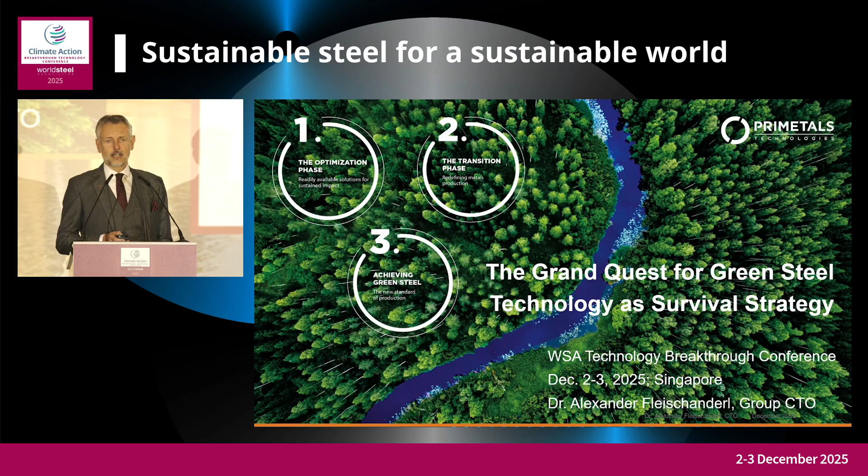Well, the grand quest for green steel - that's a kind of retrospective about the last 2 years. What has changed in the challenges, but also what is the progress we have made in this industry? I'd like to start with the challenges, the global dynamics.

We have definitely seen over the past two years a significant slowdown of economic growth. We have also recognized significant capacity increase in this industry, while demand remained pretty stable. According to the World Steel Association, we have had 640 million tons of excess capacity in this industry, and it's still going to grow - the forecast is 720 million tons a year.

That's a challenge, because that's bringing a lot of pressure on steel prices, and if steel producers are not profitable, they cannot invest into decarbonization. So that's one of the major roadblocks, I think, that has to be removed.

The other thing was the inflation, the high energy prices in certain regions of the world. And while we all have recognized that decarbonization can only work if we work along with electrification, that's a base condition - renewable energy at a reasonable price. It's another roadblock we have to solve altogether.

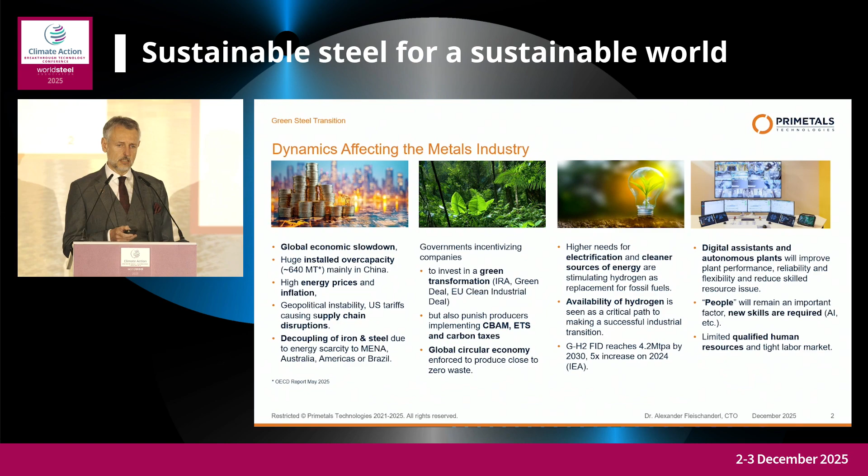And finally, we have to address that the steel industry is still not the most favorable place to work for young talents, so we have to attract young talents. And we have a lack of knowledge for the new technologies, so we have to educate people for the operation, and that brings digitalization into place.

Well, you know that slide, I always use it, and it was said also by Dr. Edwin Basson that we have a three-step approach.

First and most important, we have to concentrate on decarbonizing the existing assets, optimizing and taking every effort there. While the transitioning phase is about how to decarbonize integrated steel mills, implementing electric arc furnaces or even a direct reduction plant, while maintaining operation of the blast furnace. The last phase, we have to wait for the hydrogen economy and sufficient renewable energy to really enter the green steel phase.

That's still our outlook from Primetals Technologies, a little different from what we've heard from Dr. Edwin Basson. We believe blast furnace capacity is going to reduce to 35% from about 70% last year. But it doesn't matter if this is 35 or 50%—it's important to recognize the blast furnace will be around for a long time, and we have to concentrate on how to decarbonize that route as well.

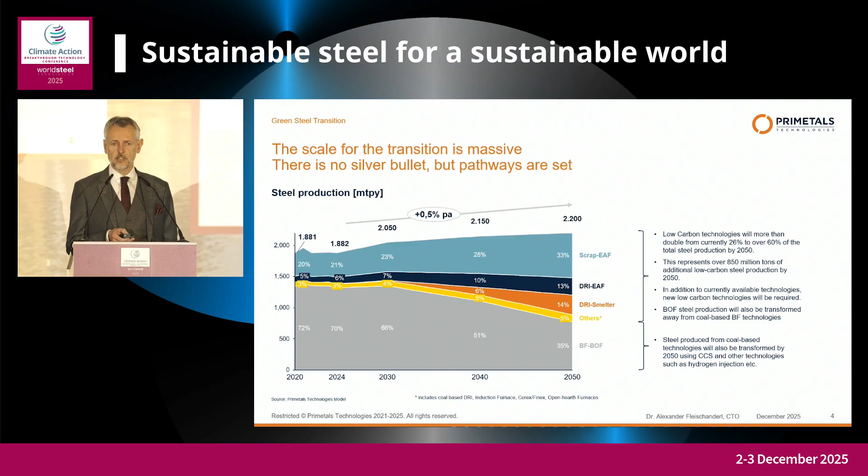We will see significant increase in scrap recycling via electric arc furnaces, which is one-third in 2050, and the last third we believe is based on different types of direct reduction technologies. So this is a huge effort—850 million tons of the actual production route will have to transition. That's a huge investment, a huge effort, and a huge energy demand to proceed.

Over the past two years it's become obvious we talk about four main steelmaking routes in the future. The first is the integrated route, where we concentrate on decarbonization. Then the focus on advanced electric arc furnace technology, mainly based on scrap but with some dilution from virgin metals. The other two routes are based on direct reduction technology, depending on iron ore quality—low or medium grade requires going into a smelter to sequestrate the high volume of slag and provide slag that finds its way to the cement industry. For high grade iron ore, we can go straight with DRI or HBI into the electric arc furnace for steelmaking.

The good thing is direct reduction technology is flexible. It can work with hydrogen, but it can also work with natural gas or any mixture thereof.

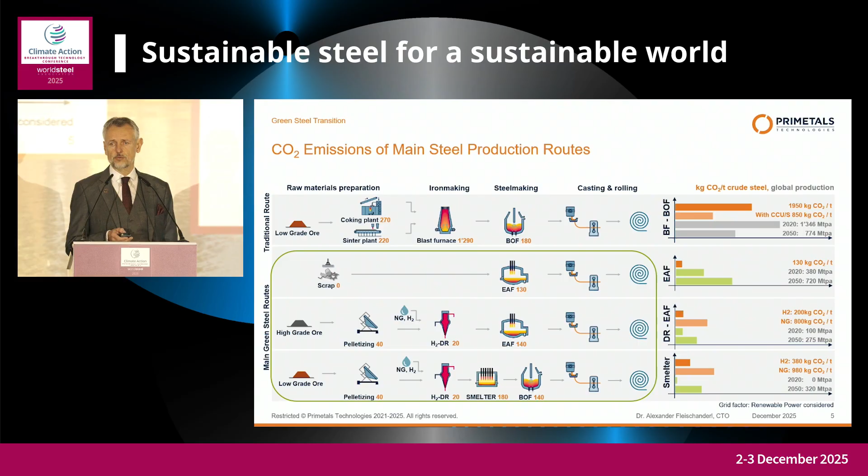Another important progress over the recent two years has been on the twin transition—adding another transformation on top of the decarbonization transition with the digital transformation. So it's all about data intelligence, digital assistance, artificial intelligence, and stepwise moving towards autonomous plant operation.

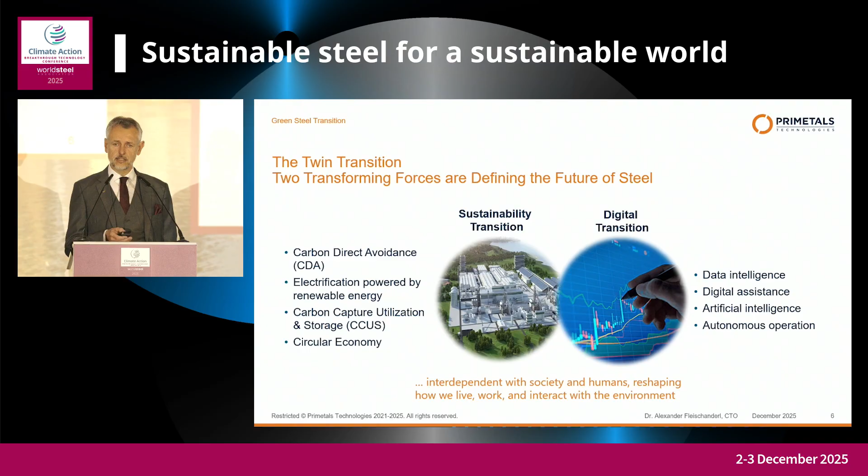So we can say both transition pathways are strongly interdependent with each other, with society, with humans. And everything is going to change—how we work, how we produce, and how we interact in this industry.

That's about the likely decoupling of iron and steel making, mainly due to the availability of renewable energy and the pricing of energy, but it's also about raw materials. Raw materials is another extremely important pillar.

We see in the future an undersupply of DR-grade iron ores, the highest iron ore grades, while likely we'll see excess capacity of low to medium grade iron ores. Therefore we believe the smelter, when it's de-risked and proven in the industry, will have its right to replace blast furnaces mid to long-term as well.

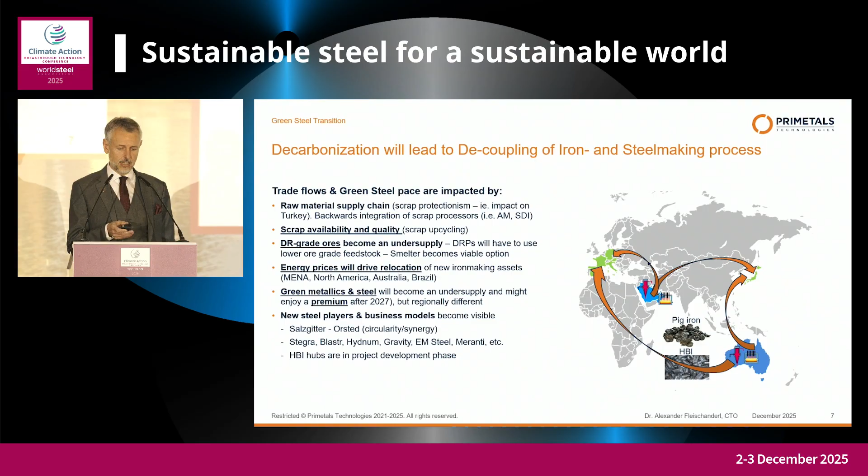Scrap, the second important raw material—we will see increased scrap at the end of lifetime, and every ton and kilogram of scrap is going to be used. That's a good thing; we will require less virgin iron ore in the future. We have to ask ourselves, and that's why we appreciate having the upstream integrated in this conference, because it's a discussion: how many new mines do we require to go for DR-grade iron ores, or do we utilize the low and medium-grade iron ore available when we blow down blast furnaces, and use this excess capacity via direct reduction and smelter technology?

Coming to these three different phases, in the interest of time I can't spend too much on individual technologies, but it's important not only to concentrate on the blast furnace for decarbonization measures, but along the whole value chain, starting from iron ore beneficiation down to the finalized steel product. There are endless opportunities for getting more energy efficient, from waste heat recovery measures.

There's still a lot of potential integrated into the heat balance there, but also improving the yield, the quality of steel, improving the lifetime of the steel, and many other efforts that we still have in front of us.

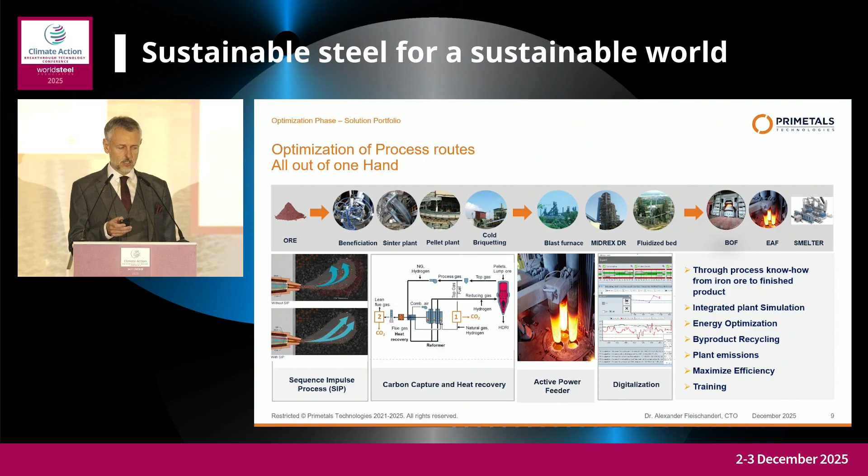I'm just going to pick one because it's relatively new, and this is retrospective about the last 2 years - that's the SIP technology, Sequence Impulse Process. It's one technology that can be added to the blast furnace operation to decarbonize, to inject the oxygen via the tuyeres at high pressure, high frequency pulsing.

This keeps the raceway clean, improving the CO gas utilization in the blast furnace, also with the potential to improve the productivity of the furnace and allowing to go for lower grade feedstocks in the burden. It's about 2% decarbonization of the blast furnace, but we know that the blast furnace is the biggest headache we have.

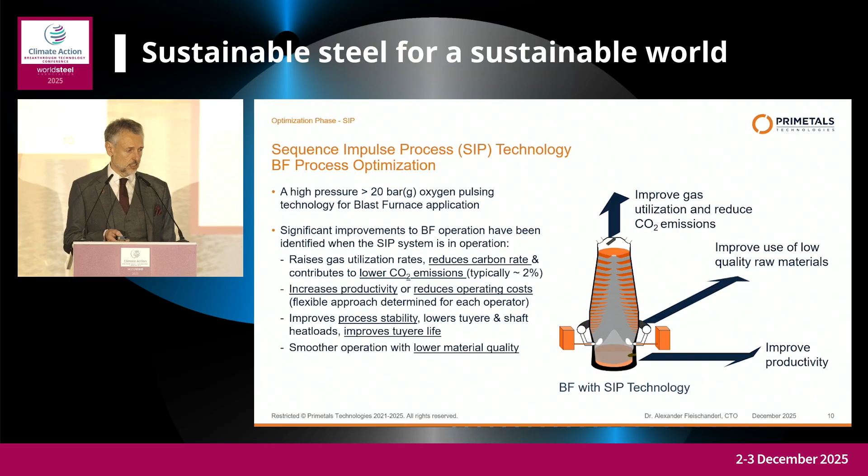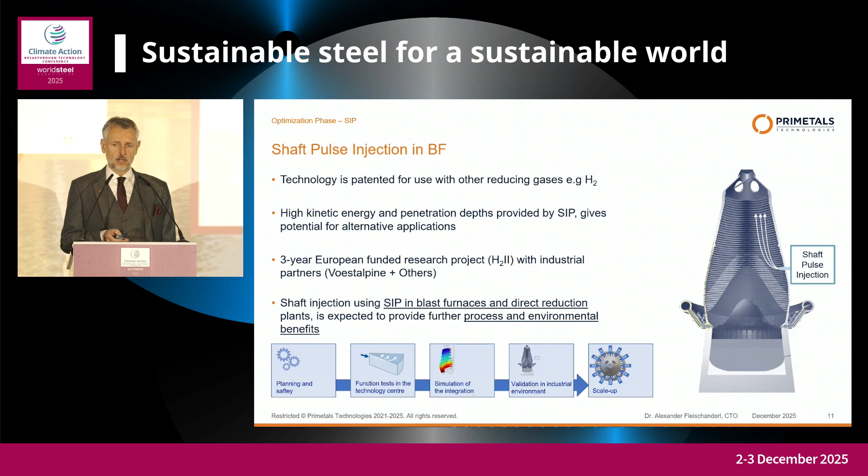We also intend to apply the same technology for shaft gas injection, and we've started, together with voestalpine and K1-MET, a project to investigate applying the SIP technology, especially for hydrogen injection in the blast furnace shaft. This is a 3 year project ongoing.

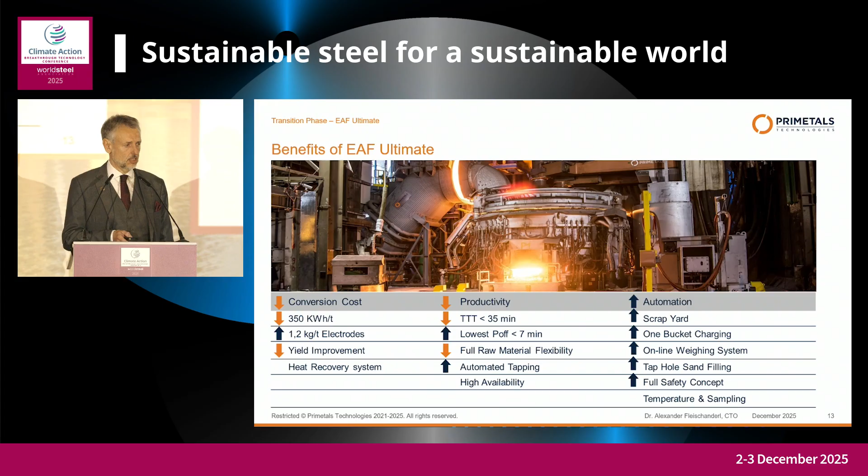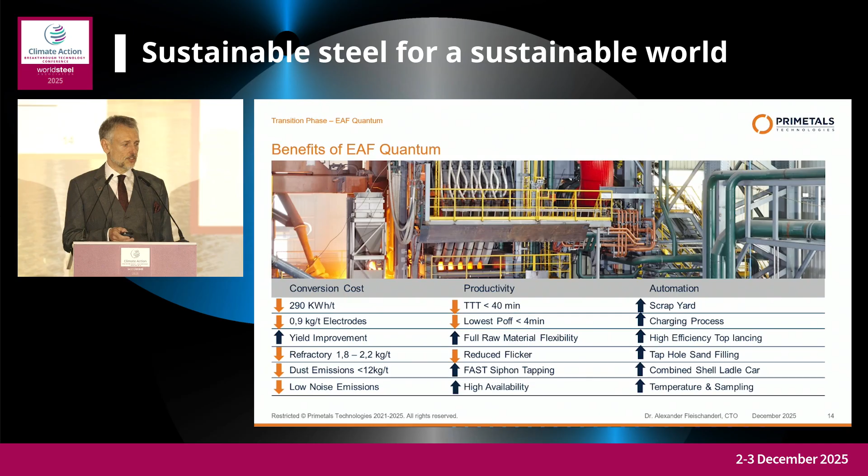The other technology is the Quantum technology. It works with preheating of the scrap, and it's the technology that utilizes the lowest value of electric energy for scrap melting. It's a furnace dedicated for high scrap rates on a finger system, and you see there less than 300 kilowatt hours per ton are possible.

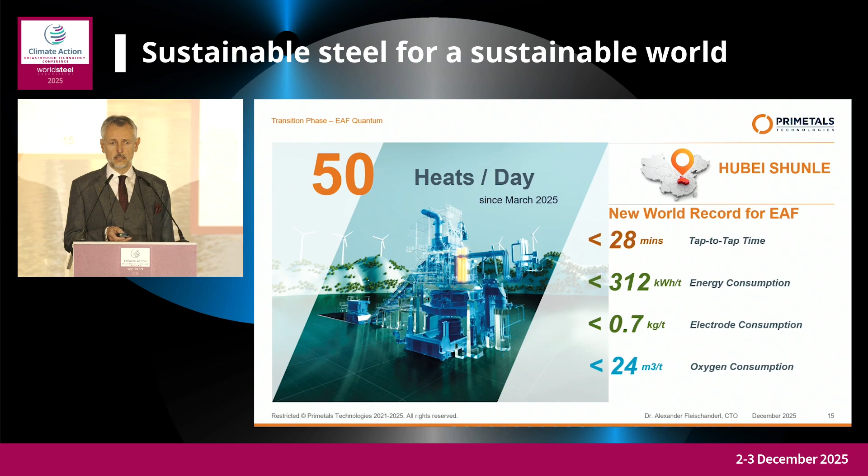Just a record that we achieved this summer in China: one of the Quantum furnaces, 50 heats per day, which means less than 28 minutes tap-to-tap time at 312 kilowatt hours per ton.

When we talk about electric arc furnace, another requirement is that we fulfill the grid code. So the more renewable power we find in our grid, the grid providers are asking to avoid any flicker, any backdraw to the grid. Over the recent 2 years we have intensively worked on developing a medium voltage-based multi-level converter technology that completely avoids flicker, also current peaks, and improves the utilization rate of the electricity to the electric arc furnace.

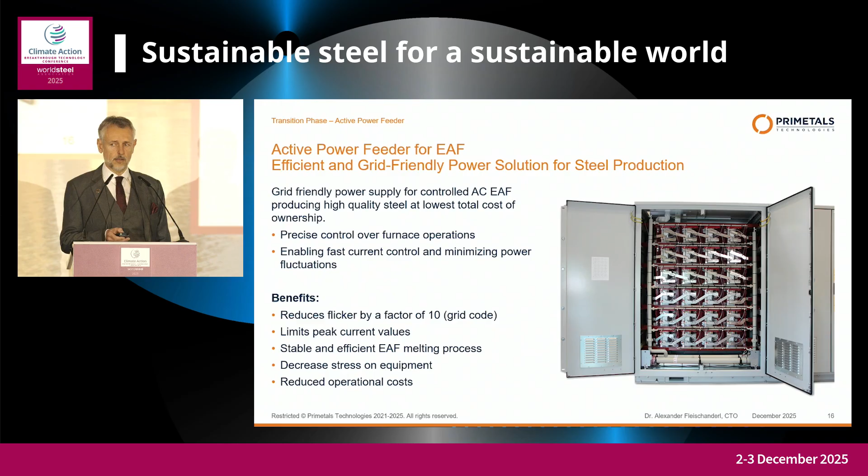I'm proud that we have started up the first of the active power feeders in the last months at an electric arc furnace in Germany, still ramping up, and from early next calendar year we are going to scale up for large electric arc furnaces with the same technology.

Talking about the challenges if we go for hybrid mills, implementing electric arc furnaces while we maintain the blast furnace and BOF route - it's a challenge because integrated steel mills are not used so far to operating an electric arc furnace, and now it's about reliably producing the same steel quality for the demand side as with the BF-BOF, and deciding which steel grades to produce on which production route.

So we have to support the operators to achieve that target, and that's the main goal of the central operation cockpit that we have recently introduced at the hot strip mill in Germany as well. The target is really that we can achieve a single man-operated pulpit for a complete facility to be operated.

That's only working if you have a couple of monitors only, not hundreds, and you have event-based tracking. Only where action is required is brought up on the screen with a recommendation of which action to be taken, and if there are multiple events, they are prioritized - what's the most important action to be taken. So that's a real guiding system for the operator, and I'm pretty sure that's the future for this industry.

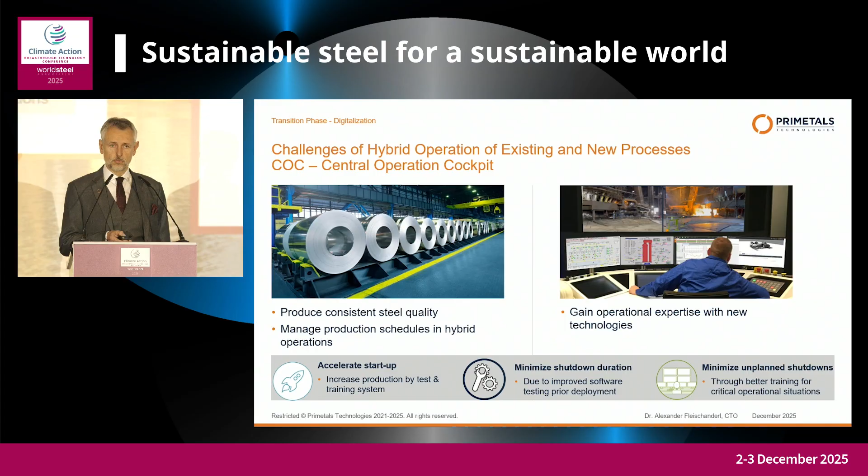And that's all about having, on the one hand side, a real plant, but on the other hand side, a full digital twin. And the full digital twin, I mean really a metallurgical and a process digital twin that can really simulate the production offline there, to develop new steel grades, to train the personnel, as said.

That's the way forward, and we see definitely, almost on a daily basis, from all the OEMs and steel producers, new digital assistants, one by one, and each of them is promoting autonomous plant operation in the mid-term.

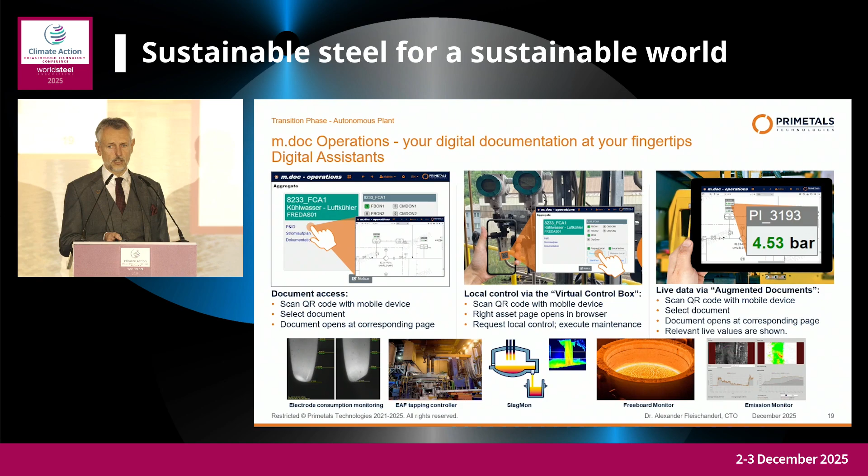So, what is important as well, what we have achieved over the past 2 years is the m.doc Operations. It's now that we supply plant components individually with QR codes. You scan the QR code, you directly link to the documentation, to the P&ID, and you have augmented real-time values in the P&ID when you go out there. So no local control boxes anymore, no cabling. You work with a tablet on that one.

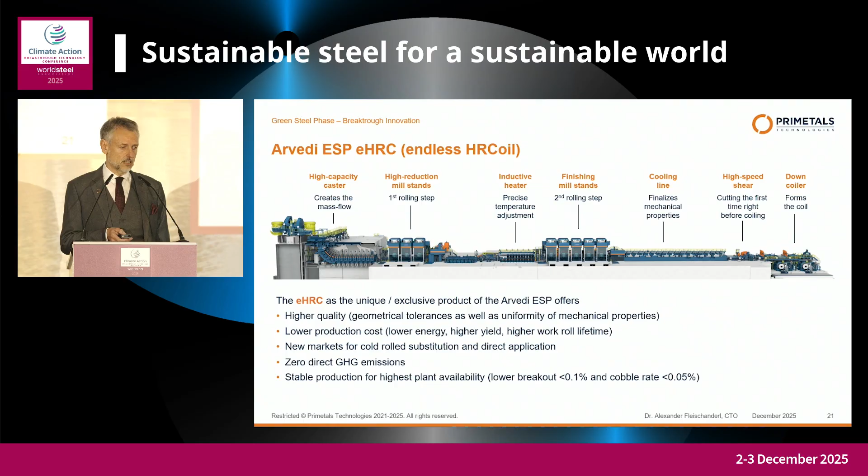And the last phase is the green steel phase. And one big potential is definitely endless casting and rolling, like the Arvedi ESP technology. I have to say it took a while, but now the industry is really obviously ready for endless casting and rolling. We've recently signed the 14th ESP contract in China, and what is so exciting is that we have partnered also with them for that one, producing for the first time silicon steel grades in a quite significant production portfolio in the ESP.

The last important thing I have to touch upon is about direct reduction. So the forecast is 470 million tons of DRI in 2070. So this means about 500 million tons of DRI capacity to be added. And there is, on the one hand side, the well-known Midrex technology where we are licensee of, but I'm going to talk about development, and that brings me to fluidized bed technologies.

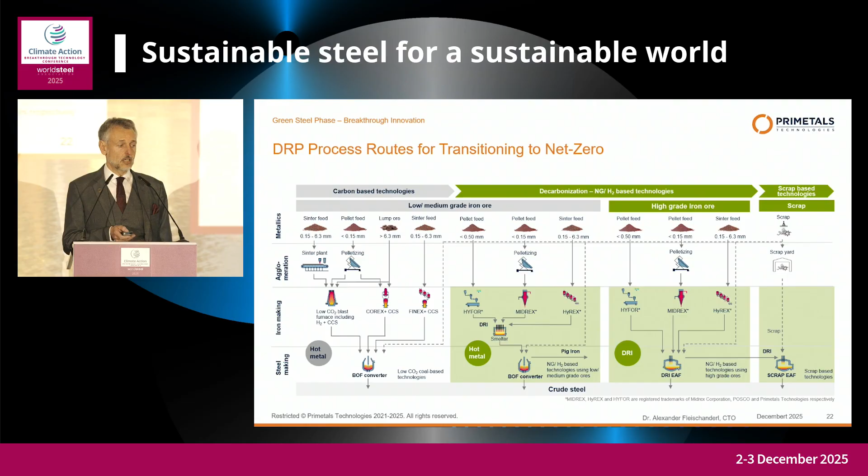And well, Dr. Kim from POSCO mentioned the pathway forward. So we are proud also to support POSCO on the HyREX development, utilizing sinter feed for net zero DRI and iron making. The other technology is the HYFOR technology, and I'm going to talk about it because, well, innovation is a marathon.

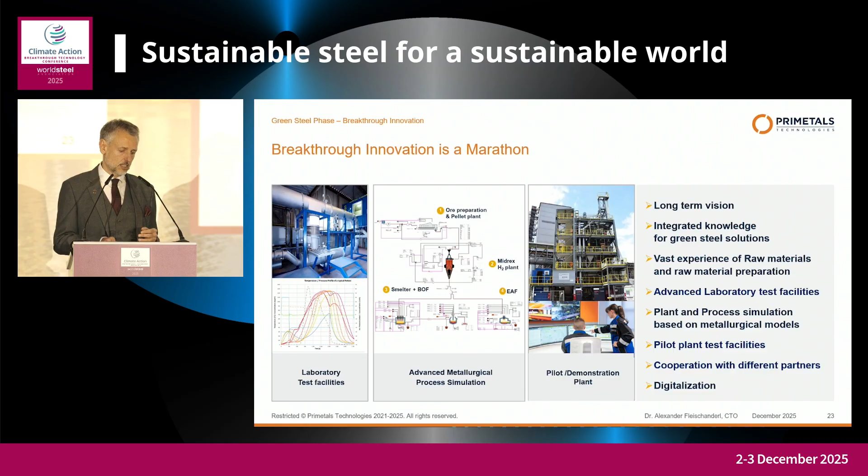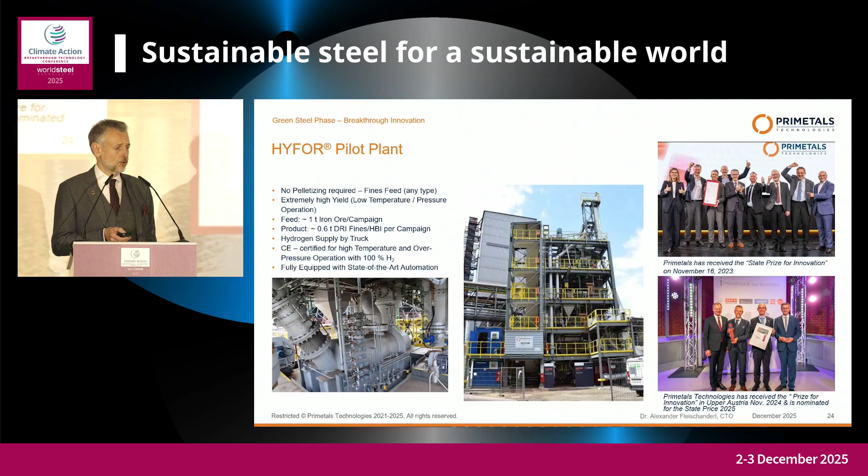And we are also proud that we have taken the FID decision in April this year, jointly with our partners, Primetals, voestalpine and Rio Tinto, and on the scientific side with K1-MET, to take now the next step for an industrial demonstration plant fully based on hydrogen, green hydrogen, renewable energy.

And what is the feature of HYFOR? It can use any type of iron ore independently of the quality. It is dedicated to operate with hydrogen, but definitely can operate also based on natural gas if it's transformed by reforming. It's a fluidized bed technology, as said. The advantage is it has the highest yield and low reduction temperature. It's a much lower reduction temperature than any other technology for direct reduction that is around.

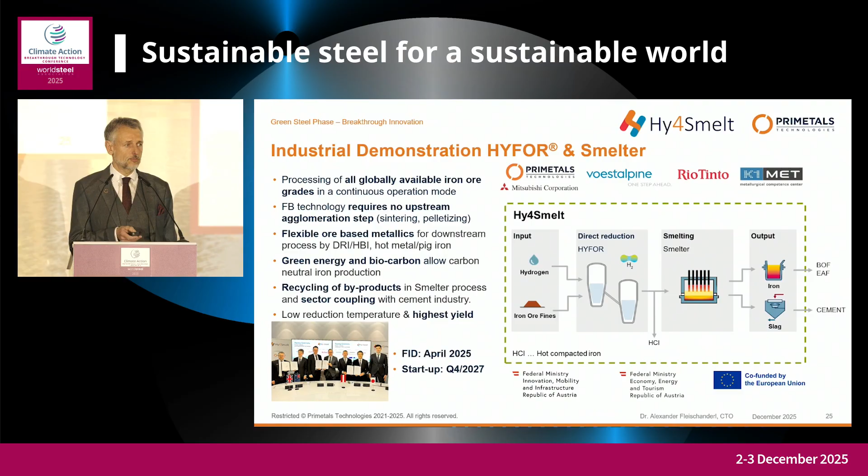So the smelter, I mentioned, we have scaled the smelter. We are implementing, together with POSCO, a demo in South Korea. We're implementing a demonstration plant in Linz at voestalpine, and we have already taken the next step to scale it up to the big size to replace the blast furnace.

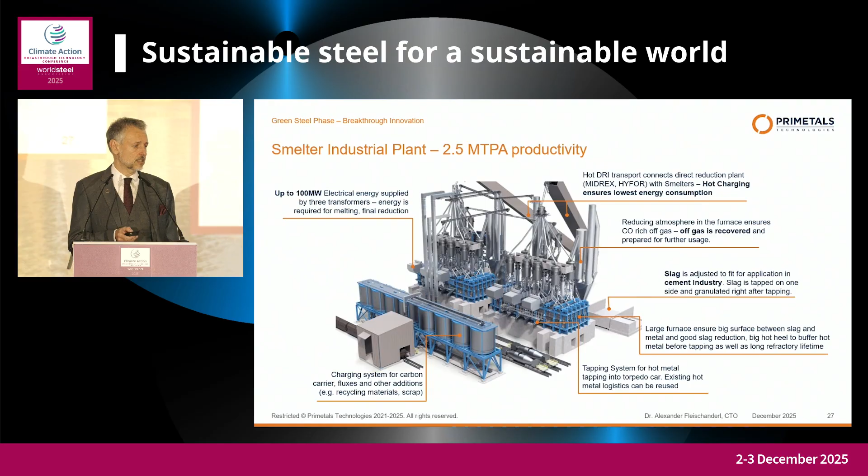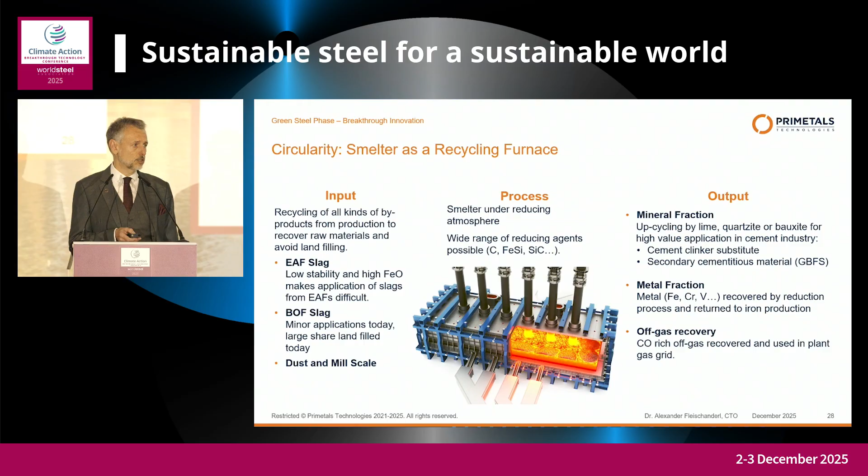One word about circularity. The smelter is also dedicated to utilize and treat electric arc furnace slag or any other type of byproducts. That's important. That's what we're going to do also in the showcase in the demonstration plant in Linz. It allows to treat electric arc furnace slag and other byproducts and to convert them into products mainly for the cement industry and recover the metal.

I'm jumping over that and coming to the end, as I consumed more time than I had already here, and just summarizing what has been said. It's a long journey to decarbonize. There is not one fit all. It's really a variety of technologies that we have to follow and to continue to succeed in the decarbonization efforts.

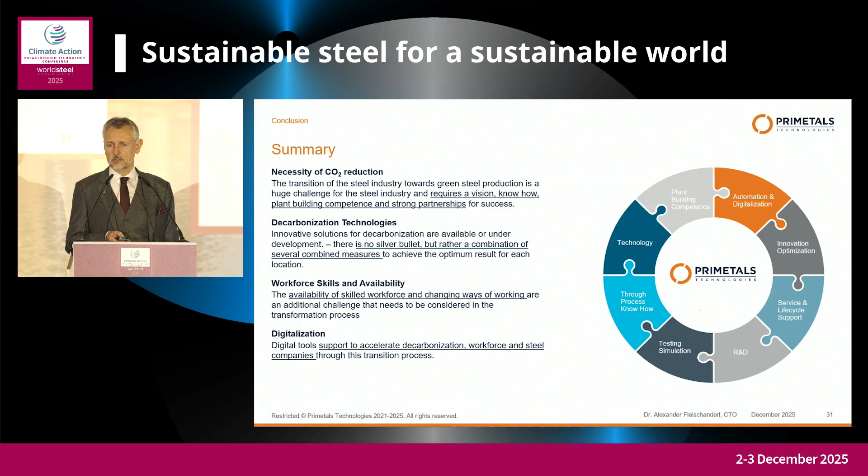It requires strong partnerships. It cannot be done by one alone, from the upstream, also including the energy sector, the OEMs, the steel producers, the politics, the financing sector. And we have also to focus on retaining skills, train people, and attract young talents in this industry. On the last point, digitalization, I have definitely no doubt this will proceed quickly, including all the artificial intelligence.

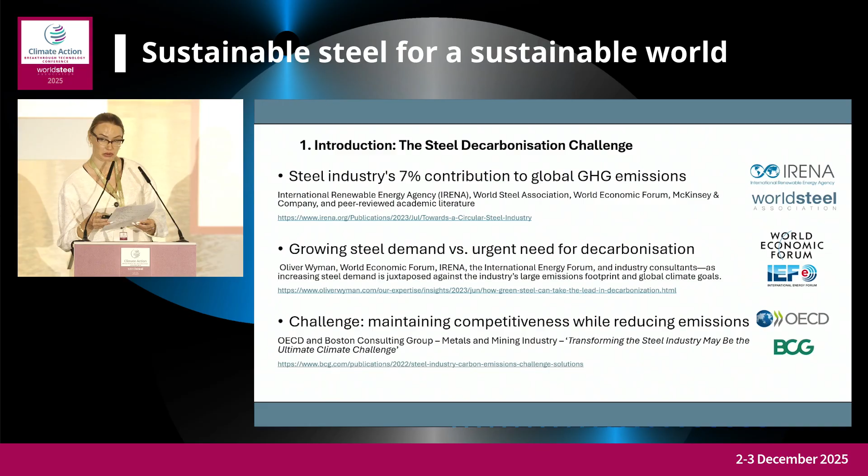We in Abu Dhabi witnessed the first metal park in the region, with a capacity of 450,000 square meters and a storage capacity of around 350,000 metric tons, with the purpose to bring the ecosystem together. The cluster is located in Musaffah in Abu Dhabi and was opened in 2025. Some of you might have witnessed the announcement of the Metal Hub during the previous conference, where it was actually conceptualized. We consider this the first step to enable industrial clustering in the Middle East.

Why is industrial clustering in the Middle East important? Because it's pooling infrastructure to reduce costs, optimizing logistics and resource sharing, de-risking investment through coordination, partnership, and collaboration, and attracting sustainable finance at scale. The Middle East has an advantageous position to accommodate industrial clustering. Two companies located in the hub are Emirates Steel as well as AGSI. And I would like to bring both cases and how they helped us succeed in emissions management and reduction of carbon footprint per unit of product.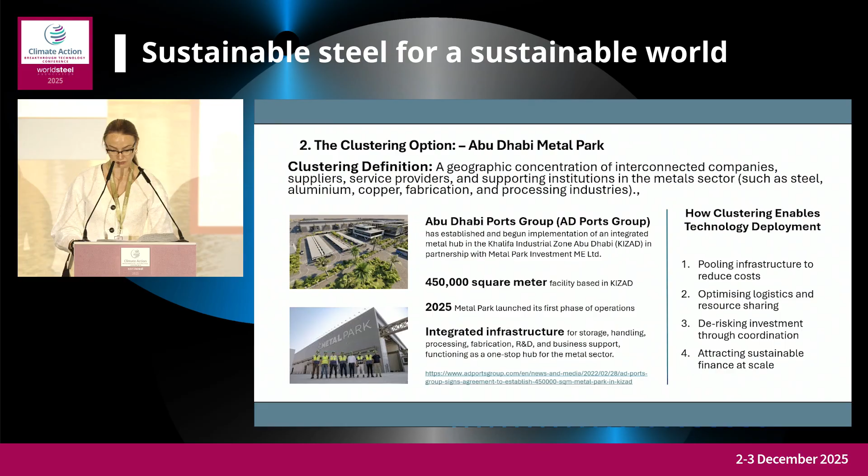So why the Middle East? As we discussed, the advantageous position of the Middle East is mostly associated with three main reasons. Firstly, we have the access to low-cost renewable energy. Secondly, we have the strategic governmental support for the industrial zones, like the one that I have just discussed. And we also have the public-private partnerships that enable the climate infrastructure.

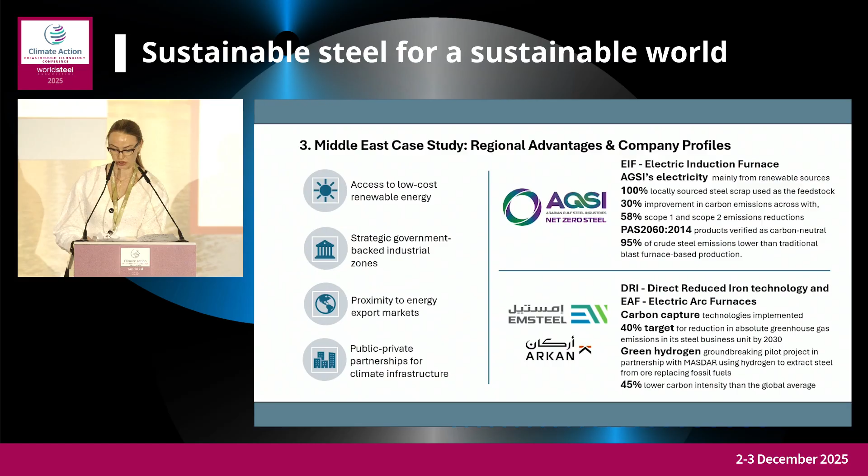So looking back at the technology breakthrough and which key technologies the ecosystem players in the Metal Hub have been using. The first and foremost is carbon capture and storage and hydrogen, deployed with the support of ecosystem players such as ADNOC and Masdar. Deploying them for steelmaking helped us to reduce emissions by up to 95% and position the UAE as the future hub for green steel production.

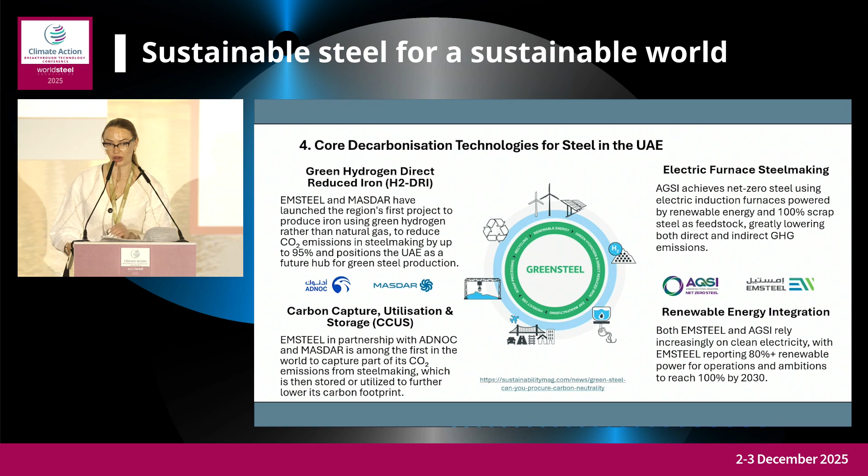Steelmaking with the application of electric arc furnaces or electric induction furnaces and deployment of renewable energy has the potential and capacity to use 80 to 100% of the energy supply sourced from renewable and clean energy sources. The deployment of those technologies has substantially increased the opportunities to progress in low-carbon steel in the region.

Concerning the investors' aspect and how we are looking at the risks and longevity of the metal hubs regionally, we see that there are three key mechanisms. The first mechanism is related to transparency in ESG and sustainability performance, as closely as possible aligned with, for example, the GRI, SASB or IFRS. Secondly, enabling policy tools, including the carbon tax and green procurement strategies in the hub.

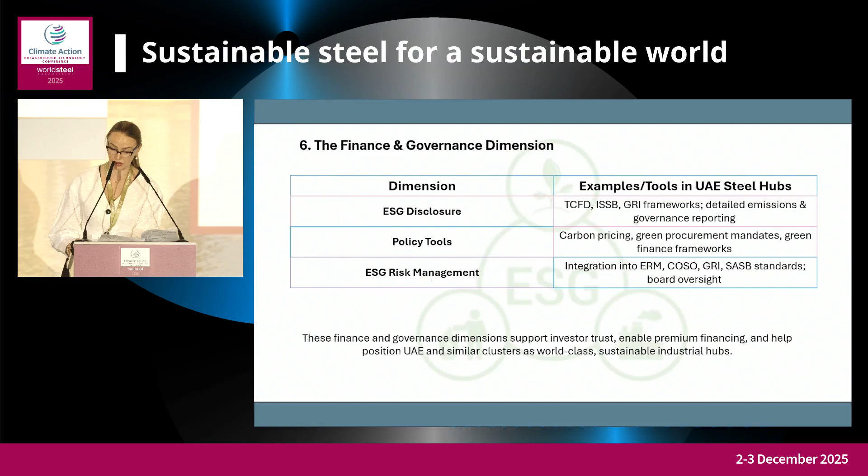And the last, a robust ESG risk management mechanism, including, for example, the enterprise risk management system and involvement of leadership in key decision making. Those finance and governance dimensions support investor trust, enable premium financing, and help position the UAE and similar clusters as world-class sustainable industrial hubs.

As the summary and the call for action that we would like to convey, we see that clustering has become viable with a regionalized approach. And I would like to specifically highlight aligned goals combining climate commitments, climate management commitments, and economic resilience, giving the example of our leadership in the country, where the decarbonization targets and ministerial commitments to increase the non-oil GDP should walk together.

And last but not least, the collaboration and engagement of partners, be it policymakers, technology providers, or off-takers, is extremely critical, and therefore I would like to encourage you to collaborate in our Metal Hub.

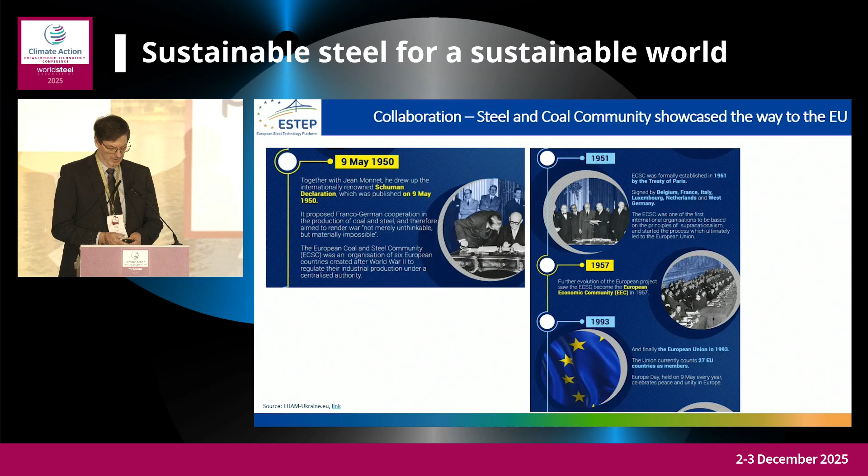More than 75 years ago, the CEOs of European steel producers sat together and decided to do something special to improve their competitiveness, to collaborate, to work together in a new way, which ultimately led, as you can see on the slide, to the foundation of the European Union. They established, together with their coal colleagues, the European Coal and Steel Community, dedicated to collaboration in research. It was a 50-year contract, evolving at the beginning of the 2000s into the Research Fund for Coal and Steel, and growing as member states joined the European Union.

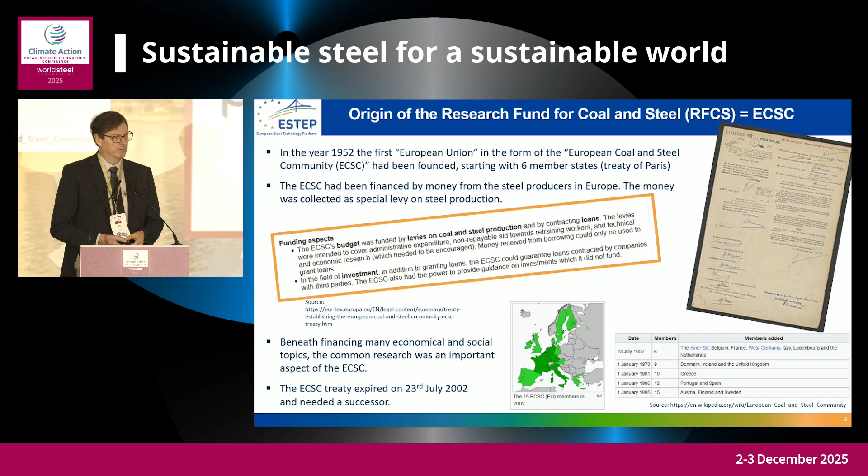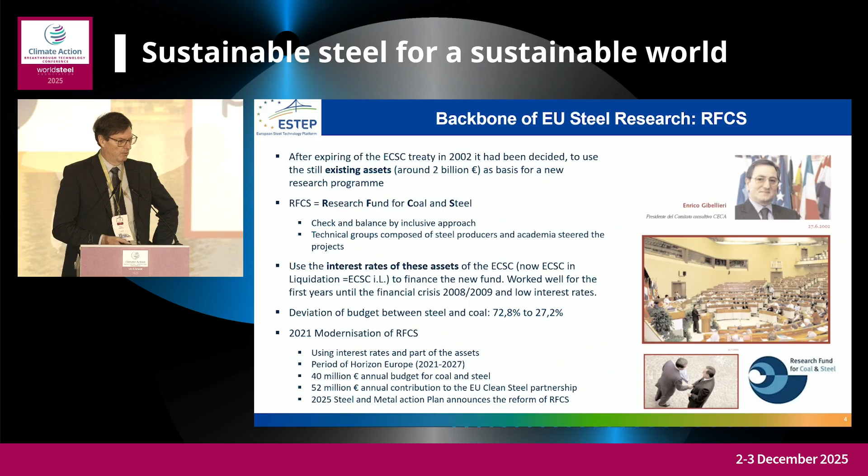It was really an outstanding collaboration example, as the checks and balances were also happening within the steel producers. And the RFCS is, in our eyes, the backbone of European steel research. We are also very grateful for the good cooperation with the public side to identify opportunities to further improve this important funding instrument. The last modernization happened back in '21.

And 2025 was the year when we decided to not add more events and activities to the already crowded agendas, but rather to see which entities are already active across steel research and team up. I'd like to present here the example with worldsteel. I'm very happy that this worked out nicely. We also have a cross-membership.

And yesterday, for instance, we had the idea to use the event where the world comes together to discuss the decarbonization of the steel sector, to also exchange views on a regional perspective, and I believe, Rizwan, you managed to organize a very good exchange yesterday for half a day.

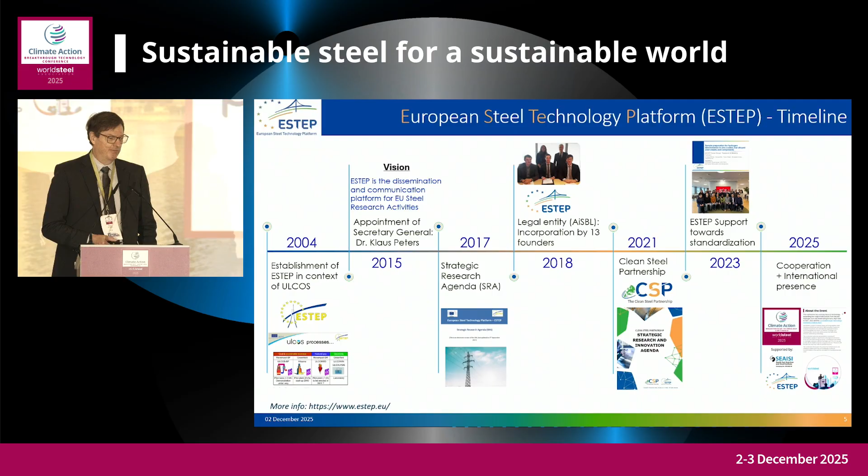The ESTEP platform brings together all European steel stakeholders, so the producers, but also technology providers, universities, and research technology organizations. The power of ESTEP is due to the membership, because ESTEP as such has only 4 people. And the example of worldsteel is accompanied on this slide by a couple of other events which happened in 2025. So also nearby Brussels, with KU Leuven, and with the university in Aachen, we had this thermal process event in September.

Also we are very happy to have an excellent relationship with technology providers, which then enabled us to bring together the community in Udine in our annual event in October. And just a few days ago, we were hosted by SMS at their Mönchengladbach headquarters to discuss the future of European steel, where a high number of representatives from the European Commission also engaged with us in these discussions.

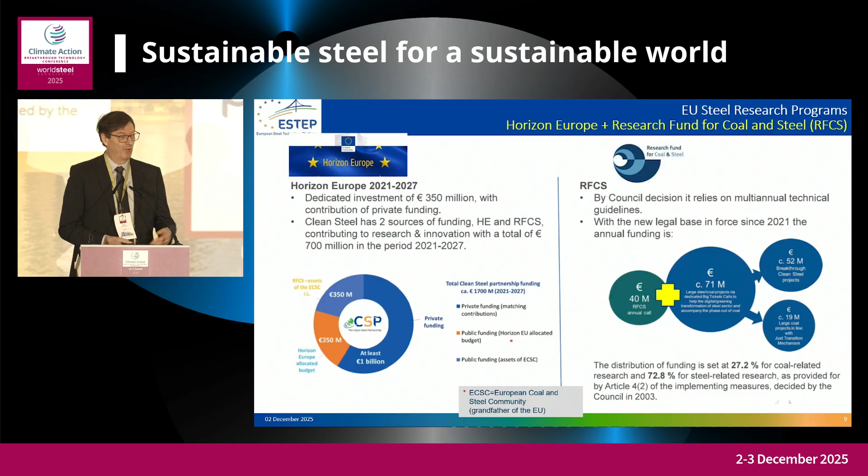And last but not least, RFCS Big Ticket, where we emphasize demonstrators, and one we've heard about already, the Hy4Smelt project. I will also come to this later on. And the Clean Steel Partnership has already been mentioned by me, and here you see that this is a dedicated public-private partnership established by a memorandum of understanding with a total size of 1.7 billion euros, making use of Horizon Europe and RFCS, focusing on pilot and demonstration projects.

And when we look into the scope and the topics which are covered by this joint research work, this slide provides an overview as the result of a dedicated project which came to an end in 2021, and of course we update the summary slide regularly, and I'm very happy to be able to present to you that there are still new ideas.

Let's go back to the slide. New ideas pop up. In the previous talk from Alex, he was talking about the smelter as if this was already an existing technology for decades, but I'd say 5 years ago, almost no one talked about the smelter.

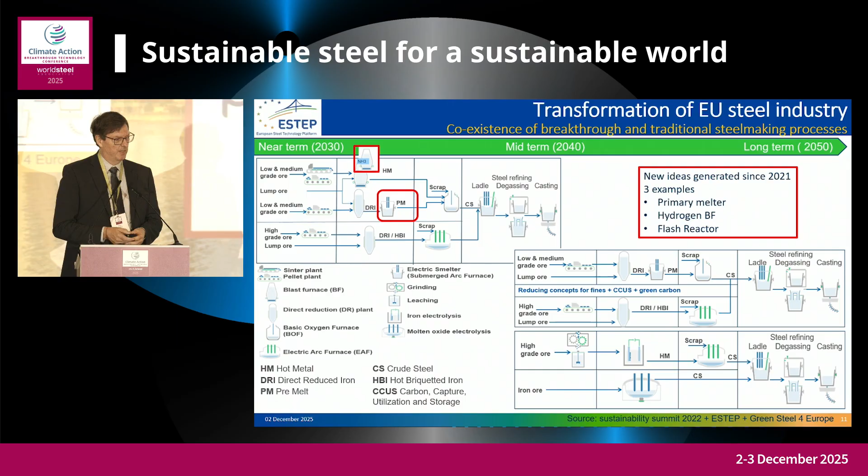And you also touched on something like a new life for the blast furnace, and I'm quite sure that the colleagues from SMS in their coming talks will also give some insights into a possible new life for the blast furnace, showing that also here we are not running low on ideas in making meaningful proposals to help mitigate climate change. And the research community is, of course, addressing many of these technologies which are summarized on this slide, and I will come to a couple of examples in the course of my speech.

On the next 2 slides, you see the summary of the running projects financed by the Clean Steel Partnership. You can see, started in 21, we have now 37 running projects. On this slide, it's the medium-sized projects funded by Horizon Europe, and the total funding altogether is more than 200 million euros, so it's already something.

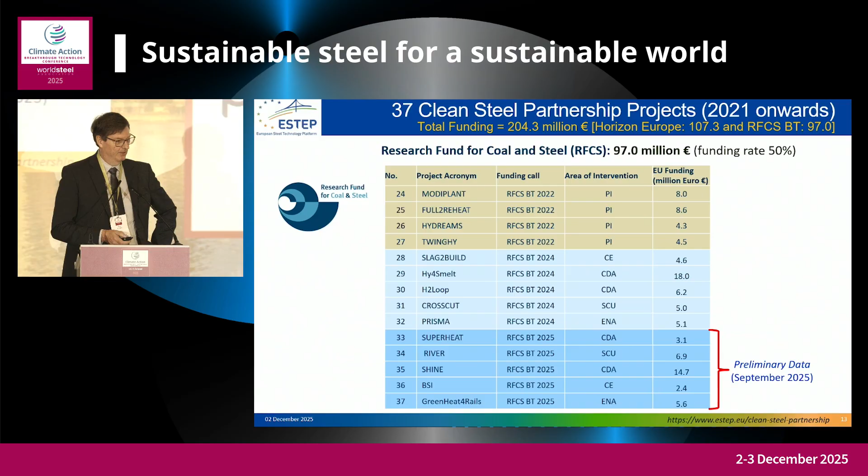And here we have the list of the Research Fund for Coal and Steel projects, and as these are the big tickets addressing pilot demonstration, we can also see that the size of the projects is larger, and the Hy4Smelt is number 29 on this slide. And the examples of the steel projects, I'd like to go into more details now, following these 6 elements.

So I'd like to start with some examples addressing the scrap issue and, of course, decarbonization, and also the work towards standardization. Slags were also already mentioned as an area of important work to be done, and I'm also looking forward to continuing the discussion with the colleagues from worldsteel, whether this is also an opportunity for a more intense collaboration between Europe and the world, and of course digitalization. And collaboration has no dedicated additional slides because in these research projects, collaboration is something like an intrinsic accomplished objective.

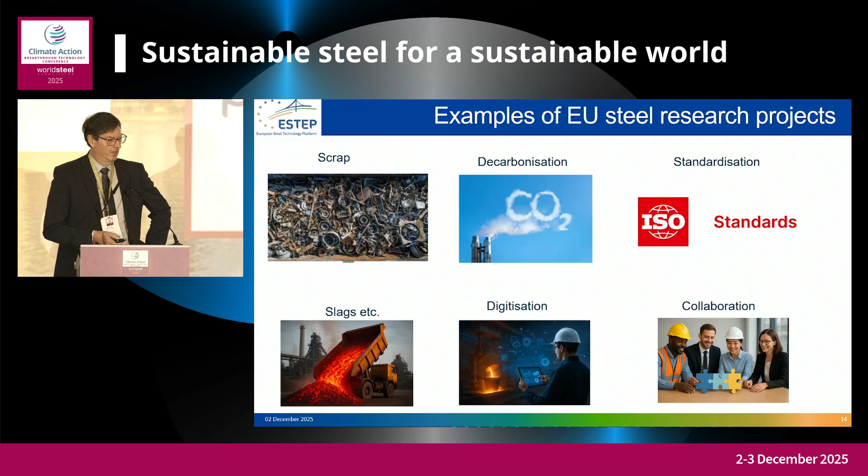So we have in the course of these Clean Steel Partnership projects 4 dedicated to looking into better use of scrap in various ways: the CAESAR, the CiSMA, the DiGreeS, and the Pure Scrap project. You can see that the projects make use of ESTEP to organize a scrap cluster workshop where the approaches were shared in order to gain knowledge also across the projects.

And when we look into the details, we can see that, of course, there are some common aspects between the projects, but each project is emphasizing different use cases. Sometimes it's the bulky scrap which needs to be classified and sorted, or in the DiGreeS project, for instance, it's all about using modern technologies to analyze and have more reliable data when the scrap enters the plant by trucks.

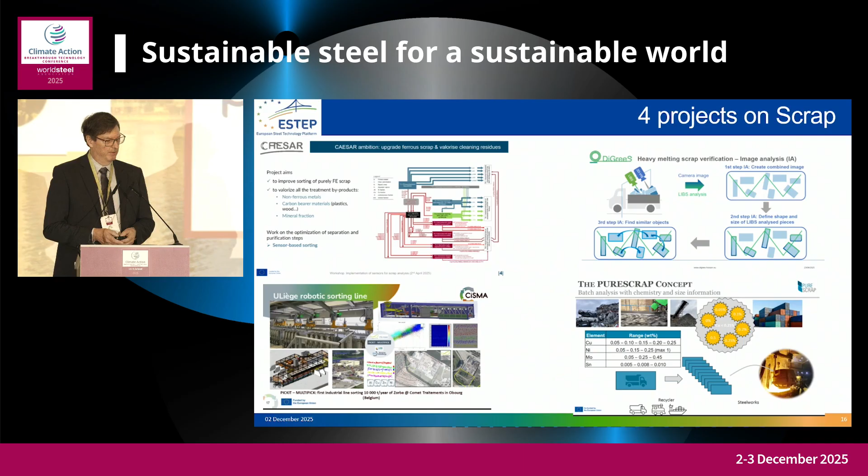And with the other projects, also shredded scrap is analyzed so that finally in the containers we have a much better knowledge about the scrap composition, so that then the melting of the scrap can be decided in a better way, or in the lower left, it's even about using robots to sort the scrap based on the analysis made on the conveyor belt. And these are all running projects.

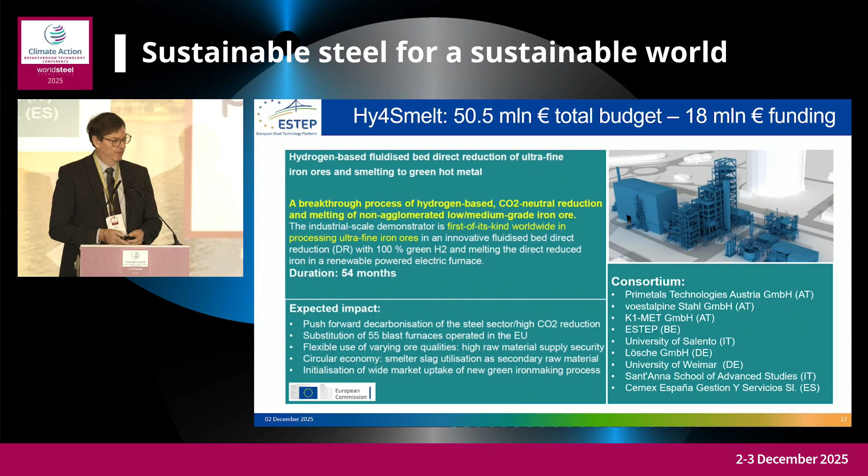And a very important project also from our side is the Hy4Smelt, for a couple of reasons. The obvious one is it's the largest project, having received funding from the Clean Steel Partnership, 18 million euros of funding. And as it has already been introduced by Alex, and I guess also Tom Bürgler will tomorrow go into more details, I will not repeat the details of this fluidized bed and smelter approach.

And if we now turn towards digitization, the example I'd like to elaborate on is the Prisma project. And this is also quite unique because here we have a consortium composed of all competitors from the technology providers, and also all steel producers are working together. And it's about establishing a platform for exchange of environmental data.

Today, many times, this is semi-automated, processed by Excel tables. And here we'd like to use the modern tools to really define a digital platform so that we can then also go to an automated exchange along the value chain, in particular also with the automotive industry.

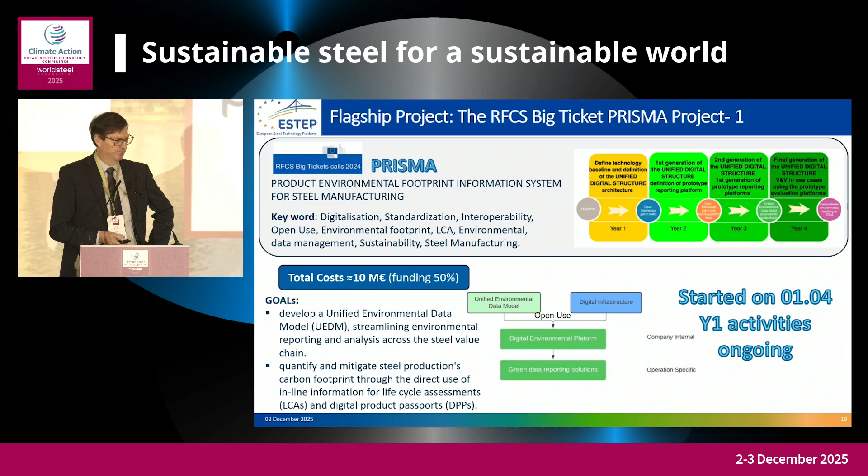And that's another example where we can illustrate the role of ESTEP being a significant added value, because the project may run for four years and make significant progress. However, if we want to really establish a new standard, much more time is needed, and here ESTEP is volunteering to contribute this extra effort, even if the financing of the project has come to an end.

And the work towards standardization is now fully implemented and live within ESTEP, due to the big personal emphasis of our previous ESTEP president, Mike Androsch from voestalpine. And it's all about supporting our mainly producer members to identify

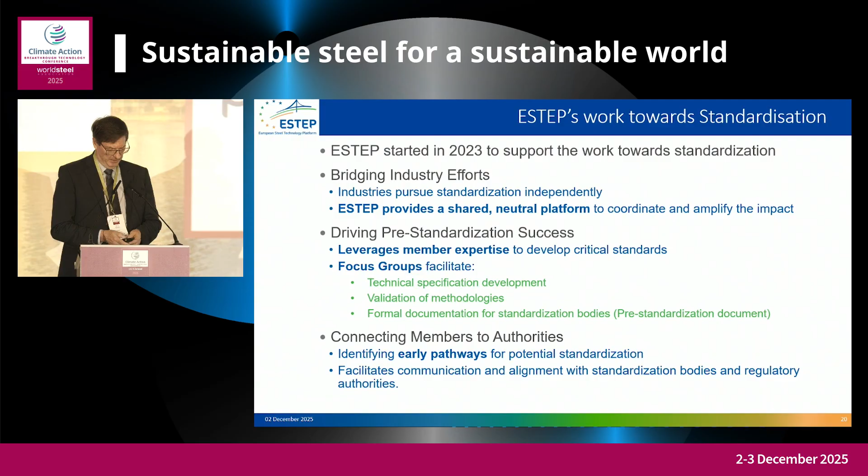the promising work and drive these towards standardization. And as already said in regard to the collaboration, the idea is to do this in a smart way. The main message is that we are not creating lots of additional bodies or processes. We are rather looking into the existing standardization processes and then use the results of the work we are doing within ESTEP with our projects, the technical

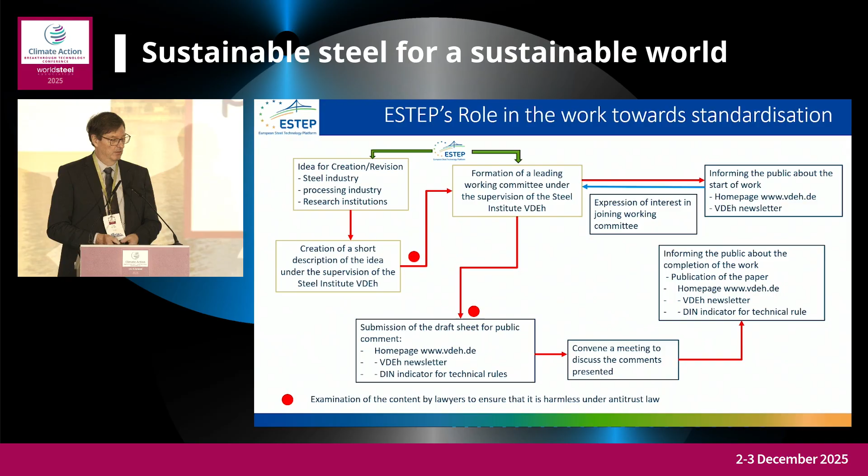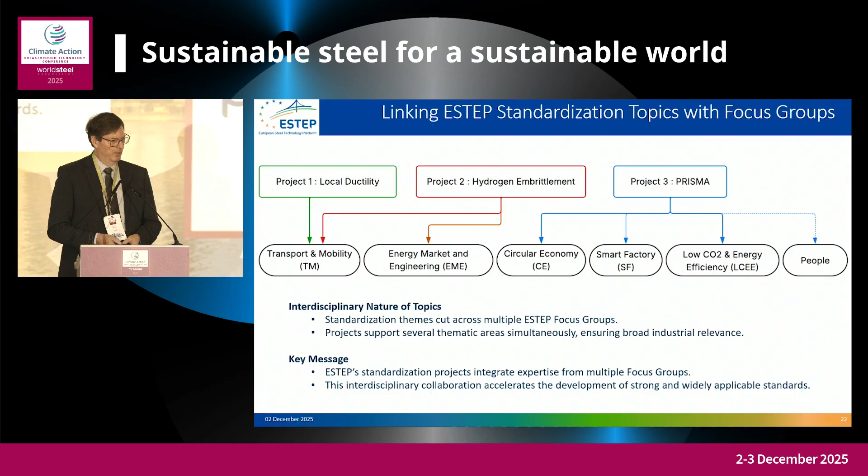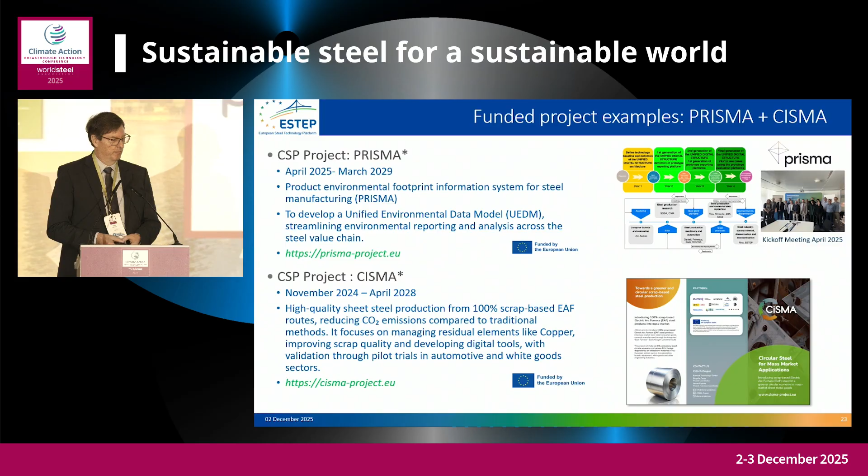definitions, and then feed this into the existing standardization processes on European or international level. The PRISMA project is one candidate, on the right side. But we also have two initiatives which are not publicly funded, but 100% financed by private money, one in the area of local ductility and the other one on hydrogen embrittlement. And also the CISMA scrap project is aiming to finally feed into a standardization process, where we are also supporting

this activity. And in regard to the hydrogen measurement of zinc-coated cold-rolled steel strip, you can see that we've already participated and contributed to an ISO meeting. And for the local ductility, we are in close cooperation with the German Automotive Association, VDA.

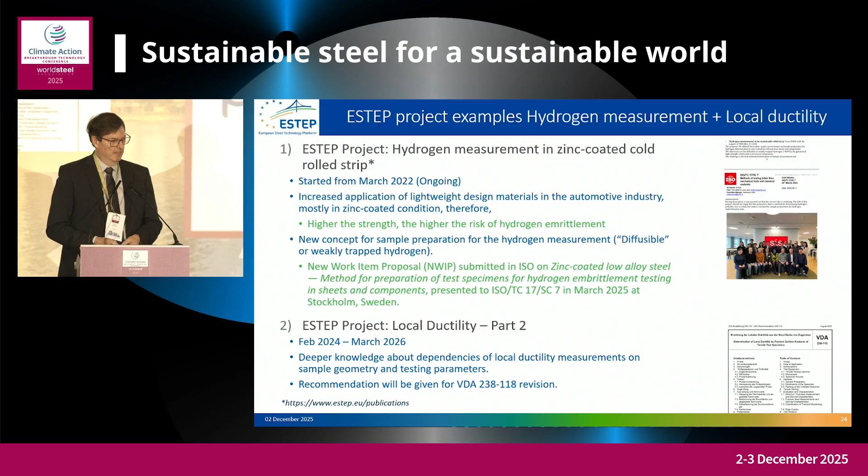And the last example of the steel research projects is dedicated to slags. I cannot agree more to what has already been said. The new processes will lead also to new slags, and in order to be circular and environmentally responsible, we need to find solutions.

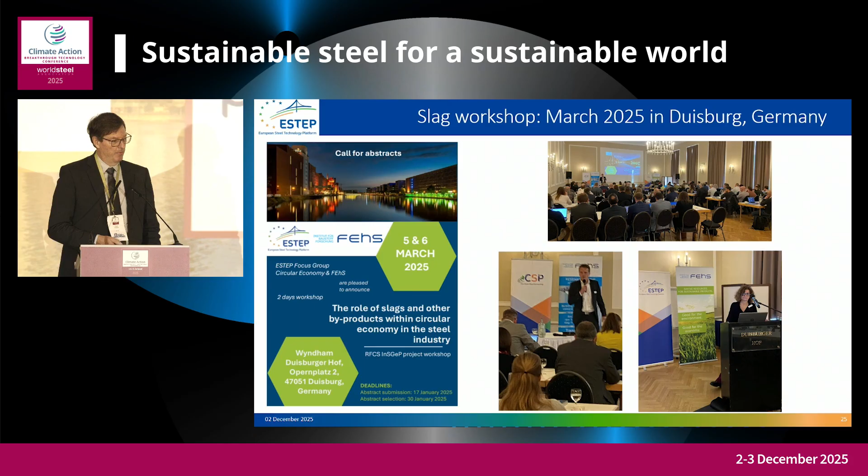Here you see some pictures of a slag workshop carried out in Duisburg in March '25, bringing together experts from various slag-orientated projects. And this is also a very important agenda item of one of ESTEP's working groups, which we call focus groups - circular economy.

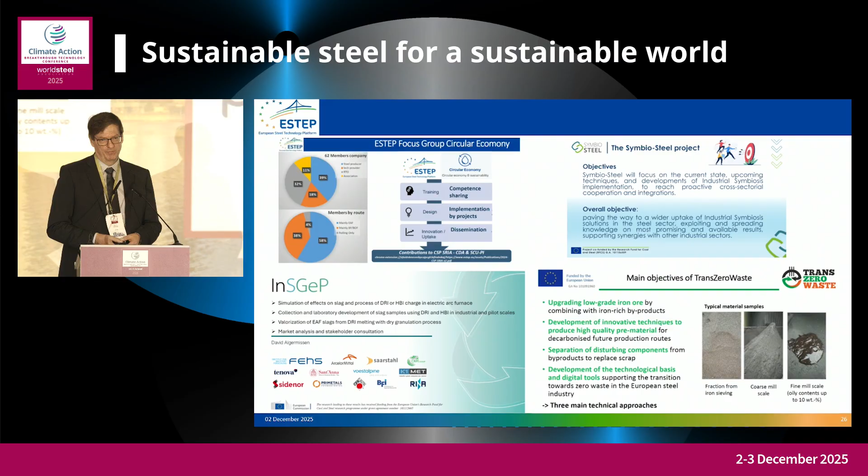And with the Trans-Zero Waste project, there are also attempts in general to reduce waste, so it's not limited to slag alone, but also - as already mentioned - that dusts or sludges are also often an important area to make progress, to provide it as feedstock for other industries, and by this reducing landfilling to a reasonable amount.

And slag for sure will be an important topic for future projects in the context of the Clean Steel Partnership. And this brings me to the concluding remarks. The Research Fund for Coal and Steel is the backbone for European steel research, being a very lively and active community.

When we have more and more progress in regard to the transformation towards green steelmaking, I'm very sure that we will also experience surprises. I believe it's very important to have such an active community so that solutions can be identified quickly and implemented. Most of the research is happening in the area of decarbonization,

but we are not forgetting that progressing in regard to products is also important, and that is also happening. The main idea of this research is to be prepared as soon as we have more and more full industrial-size installations, in regard to deep knowledge of what is best to be installed.

Because we are, of course, also realizing that the business case is not easy as of now, and this is not accelerating the investment decisions at full size by industry. But knowledge is for sure a smart way of de-risking.